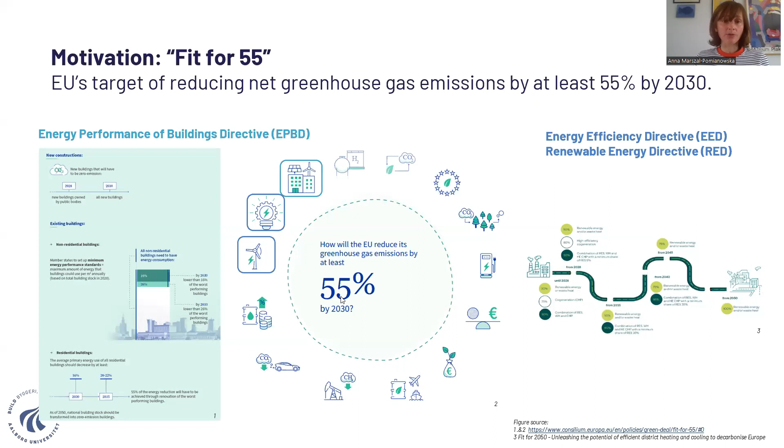So we have two, or actually three, directives pointing both to the building sector and to the core of district heating and cooling, because one cannot exist without the other. On the other hand, you also have the district heating and cooling system's own transition.

This also pushes the building sector to be designed and operated so that these lower temperatures are enough to heat our houses. This is also driven by how many different systems or technologies are involved in the different district heating generations, and we expect more low-grade waste heat and more heat pumps, which operate best at low temperatures.

This is also what is pushing the building stock to become more efficient and enable this transition for district heating and cooling systems. So those are the drivers for the building stock to go through this energy efficiency and digitalization transition.

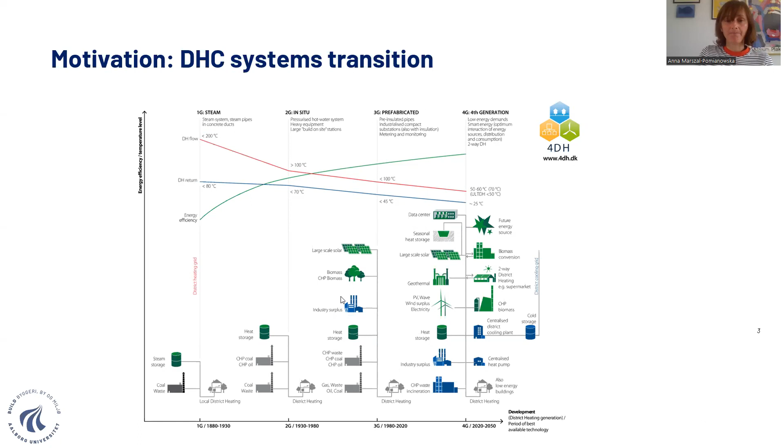Then the next question is: is the building stock digitalized? This is a bit difficult to say, how do you measure if the building stock is digitalization-ready? But I came across some statistics showing the penetration of smart homes, which to some extent is understood as buildings that are digitalized, having smart solutions we can control remotely, like setting our thermostats on and off.

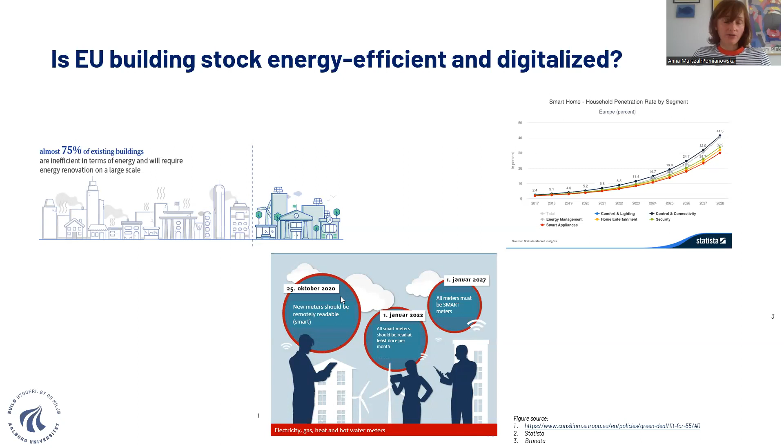Now I will start with this framework and tell you what we do on our side in Denmark with this data from smart heat meters. Our district heating sector is very well developed — more than 65% of our buildings are connected to the district heating system. This means we have a lot of data from around 2022.

They also have 6 different periods. You could think we're used to saying we have summer, winter, fall, and spring, but our studies show we have 6, and we don't have a fixed heating start point of the heating season.

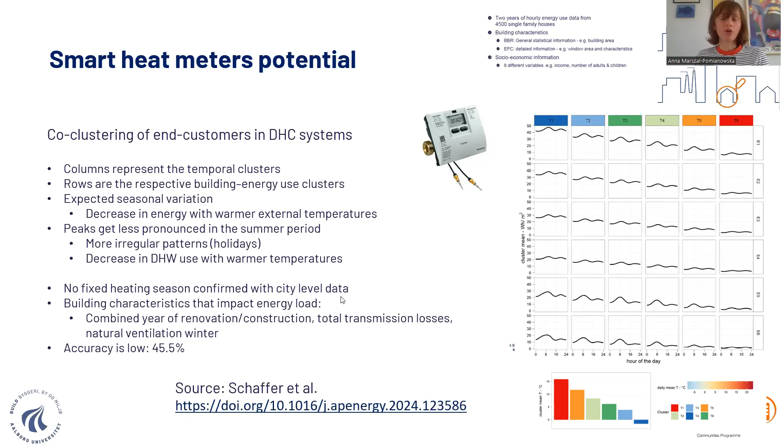This is because of all the heating habits that occupants have, their heating practices that impact how the load looks, and we don't have this information. So this is where we feel there is still a kind of low-hanging fruit — to look more into occupants to achieve energy efficient buildings.

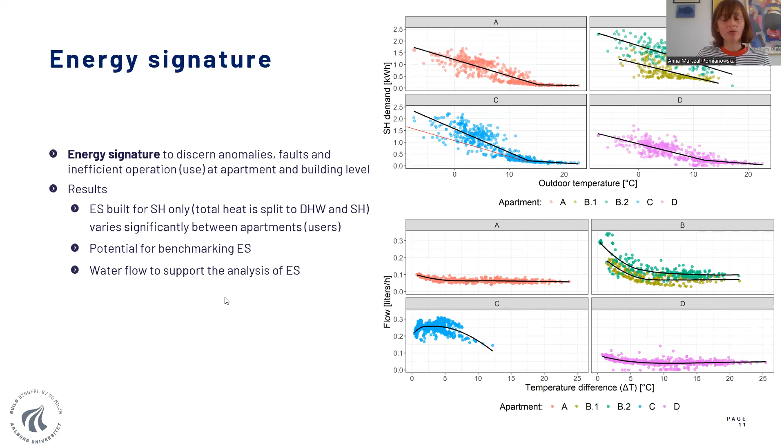So probably either they have higher temperatures, maybe they ventilate the house differently, maybe they don't use all radiators to heat up the apartment, maybe they only have one. That means it's what we call inefficient heating behavior. So this simple correlation between outdoor temperature and space heating demand shows us how big an impact occupants' heating habits have on how and when the heat is consumed.

And then to build further on that, to zoom in even more on what happens in those apartments and where are potential faults or places for efficiency improvements. Yes, so where are those inefficiencies? We also work with this data, and I have to say it loud and clear...

This is data that comes from the commercial smart heat meters. We don't do any magic to the data, we don't treat it to be, I don't know, higher resolution or look better. We just take what all the utilities have from the smart meters, and we looked into faults.

The first thing we have acknowledged is that many occupants don't understand how to operate their heating systems efficiently. They think that if they have one radiator running, this is actually the most efficient way to heat up their houses. We also acknowledged that heating systems are very diverse, and this is the challenge.

It's a challenge to make uniform energy efficiency policies or standards, because some people have underfloor heating in the whole apartment, some only in the bathroom, some only in the basement or the garage. So all of those operate differently, and this is what we looked into - what is the typical behavior of the data from the smart meters that indicates what the fault is.

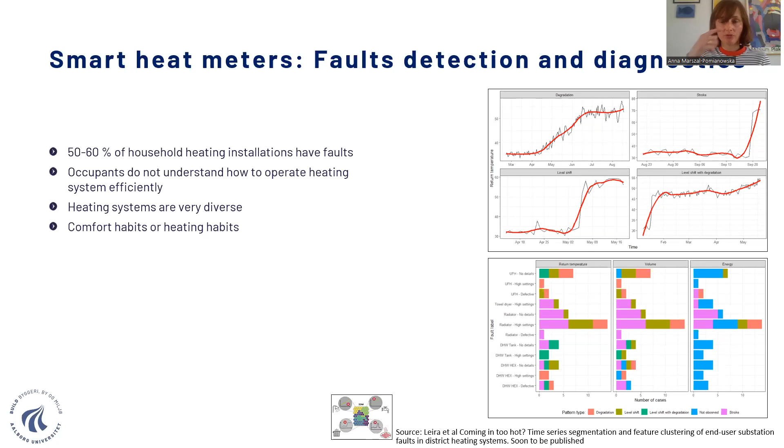Our main finding was that if we want to proceed with automatic fault detection - which is what many utilities would like to do - we have to move away from energy and instead start to look only at the return temperature from the houses. Or, of course, sometimes in combination with volume. Those two parameters should help us achieve an energy efficient building stock that uses the digital data available to improve energy efficiency.

And then I think the final slide goes back more to the helicopter perspective - what I like to say is to look at what the potential is, where the weaknesses are, where the opportunities are, where we want to integrate the energy system, the heating sector, with the building sector. So how the two can benefit each other - buildings delivering some flexibility, maybe some short-term storage to the thermal networks. We conducted a SWOT analysis and identified 17 different components.

One of them, for example, is that there is a lot of state-of-the-art knowledge on this aspect. District heating and cooling professionals just have to tap into this state-of-the-art knowledge and hopefully integrate it into their business-as-usual practices.

We have acknowledged that customers are ready and aware of their potential to contribute to solving some challenges in the district heating and cooling sector. It's a lot about social and economic aspects we have to think about - what are the business models to activate the buildings, and how digitalization can help to do it.

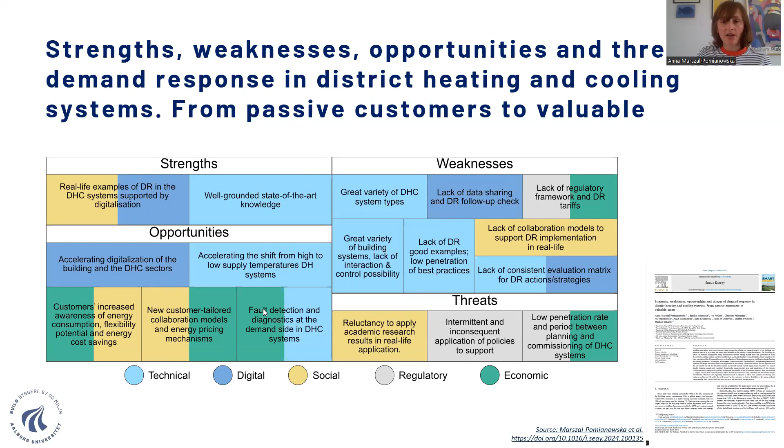Maybe one of the weak points of proceeding with even better digitalization is the lack of sharing data between the different stakeholders in the whole value chain. So this is a finishing slide to say that if we want to reach an efficient and digitalized building stock, we always have to think about the building systems, not only household practices but also the surrounding utilities and framework, because some energy efficient and digitalized buildings will be suitable for one type of district heating system, but the same ones might not fit another configuration of the district heating and cooling system. So copy-paste solutions might be good to look at, but not the only way to go.

So this was all from my side. Thank you very much for the invitation and the possibility to talk about the building stock.

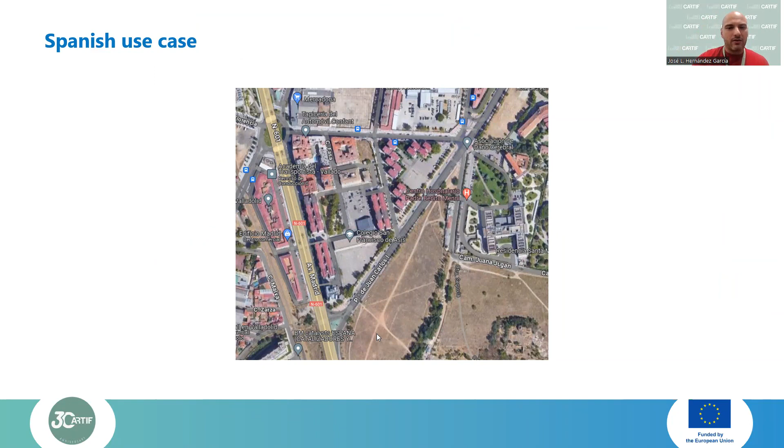In this sense, let me go to the Spanish use case. This is the set of buildings that we have in our district heating. It's composed of 20 buildings. Some of them are together, so you can see here this distribution of the buildings. This is located in the Valladolid city, that's the location where I live.

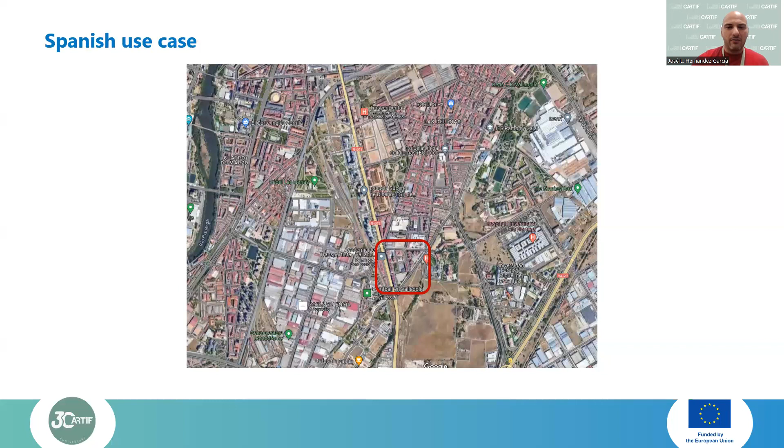Finally, this is Valladolid, located in Spain, continental climate. And in this sense, you can understand what is the context of where we are and why this district heating is important according to the climate conditions that we have in Spain.

The configuration of the district heating is, as you can see in the slide, we have 3 boilers. First, 2 of them are biomass, and one of them is the gas-fired boiler to support the peaks of energy.

The district heating network is providing energy to the 20 buildings I mentioned before, and also the electrical needs for energy that are coming from the grid, but also a PV system that uses power to heat in order to contribute to the domestic hot water demand.

But also they are using it for the buildings. But usually the excess of energy is not too much, to be honest, and is mostly used for the thermal energy usage.

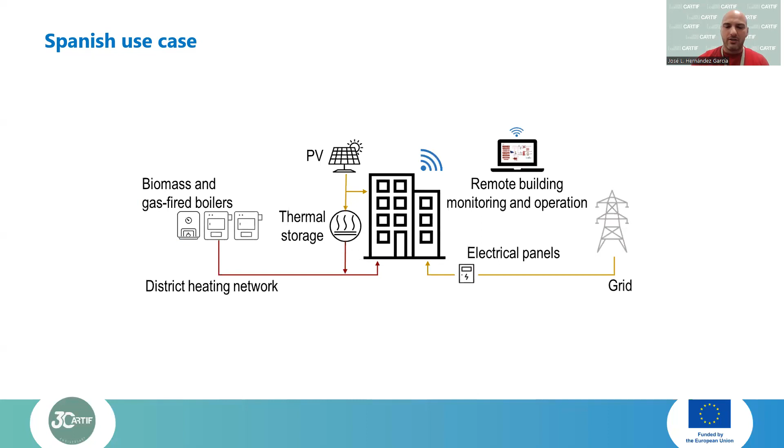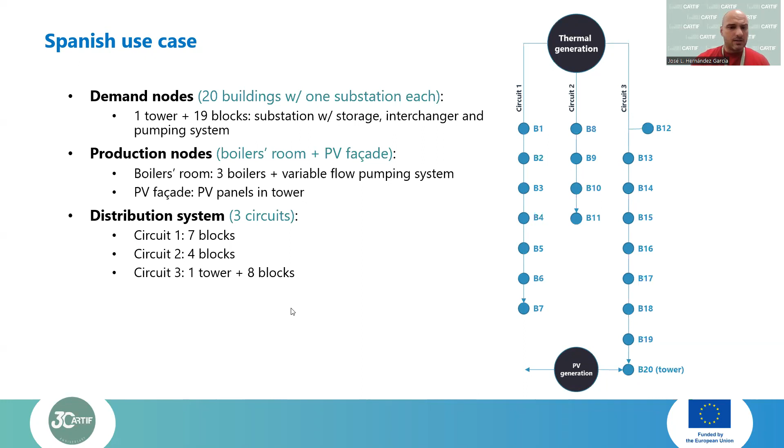We have, as mentioned before, the 3 production nodes with the boiler room, 2 of them biomass and 1 of them gas fired. And as I mentioned before, the distribution system.

...that we have the users' information that is very important, not only for the feedback from the occupants about comfort, but also facility managers. So all the stakeholders should be involved in the digital twins. In this sense, we have the comfort parameters from the users, but we also have the operational parameters from the facility managers, because they need to determine how the district heating network should operate according to the different set points for the temperatures, the different hours for schedules for the boilers operation, and so on.

Usually, as I mentioned before, the different information, the real-time information is coming from the SCADAs for the system, so the real-time sensors that they have. But this is not enough in our case.

We are also using what we mentioned, the district heating information model, that is contextual information that provides enriched data for us. That is like the configuration of the system, the pipes, the insulation of the pipes, the part of the buildings as well, how the buildings are insulated, and this information that provides us the demand and the losses of the system. That is very important.

In many occasions, this information is not used in the district heating operation. This is part of the district heating, the buildings and the pipes and the distribution system.

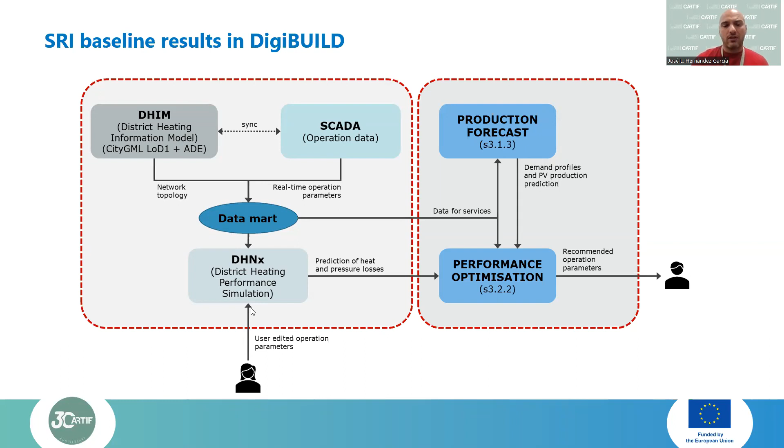With this, we have created a model, a static model for the buildings, as you can see on the screen.

We base this on CityGML information, where you can see not only the buildings in order to provide the demand, but also the pipes of the system, the different circuits of the system—first, second and third circuit—in order to obtain the distribution losses in the network.

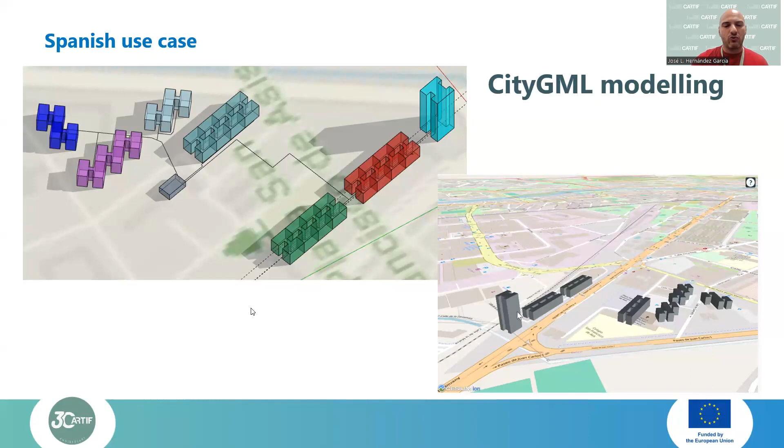Here you can see the 3D model of this system in order to provide the visualization that I mentioned in the first slide, which is also very important in digital twins: how to visualize the information and provide useful data to the users.

You can see here how the digital twin looks like. We have the CityGML model with the different buildings in the area, and we can see different information from the buildings—static information about the heated area, the energy demand, and so on. This will help the decision making.

The static information part is not changing along the time, but the energy demand is continuously calculated in order to determine the energy demand in terms of domestic hot water heating and cooling—mostly heating—for each one of the buildings.

With this, we are able to simulate the different conditions of the system. You can see here the heat losses and the pressure losses in the distribution system according to the configuration from the user, and how the different circuits behave according to the operational parameters of the facility manager.

With this, we are able to provide an algorithm to optimize the energy resources that we have, which is currently being developed, but at least the user has this kind of information in the digital twin. This includes not only real-time data coming from the SCADAs and applying artificial intelligence, but also static information that provides all this contextual data that is very important in the digital twin.

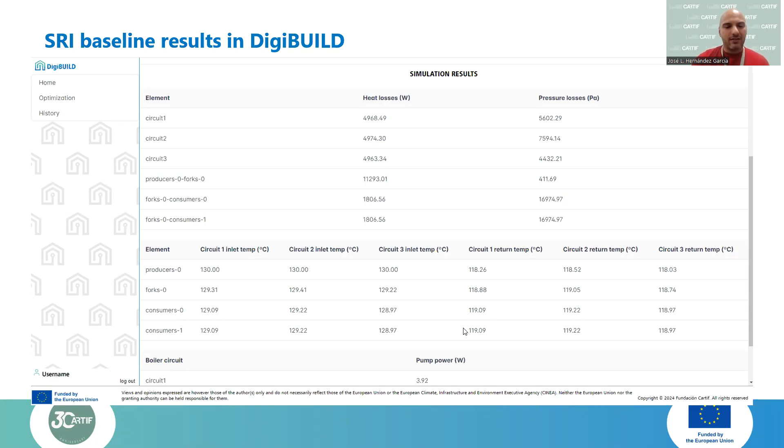According to these developments, the benefits we have in this design are that with this data we can define the optimal management and control strategy for the facility manager, how to optimize the behavior of the network, as I mentioned across all the presentation today.

Very importantly, at the end, we are working with facility managers—they want to earn money. So we are also reducing costs because we are reducing the wasted energy in the district heating. We are not generating more energy than needed.

We're also enlarging the life cycle of the boilers. We are able to balance the load for the different boilers in order to provide just the demand that we need, not providing more energy than needed. This means the boilers will work fewer hours than currently, improving the quality of life of these boilers.

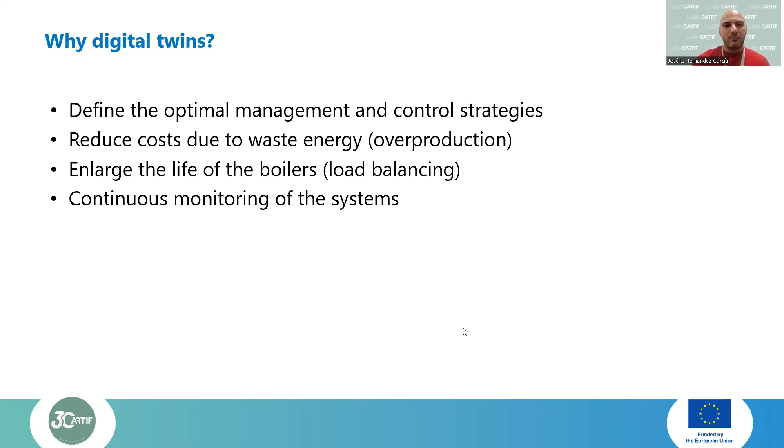Monitoring of the system—as I mentioned in the first slide, real-time monitoring. So we are all the time monitoring the systems and adapting the set points and the different conditions of operation according to this data. And yeah, that's all from my side.

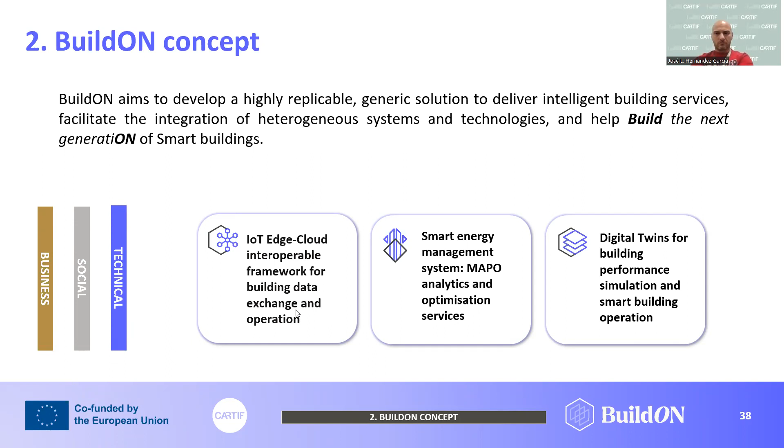BuildON is built on three main pillars, or three main dimensions: business, social, and technical. We will delve more into the details of the technical one. Today, there are three main components delivered in the framework of the project.

The first is this interoperable framework to facilitate seamless exchange of information. Secondly, we have a set of smart energy management solutions through the MAPO services, which we'll provide more details about later. And finally, the digital twins for building performance simulation and also for operation. As I was saying, this is actually one of the main challenges of the project, because we will try to go a step further.

If we go more into the details of the MAPO services, it corresponds to monitoring, assessment, prediction, and optimization services. These categories are divided into different layers. There's one layer, more analytic, in which we will provide services first for energy assets monitoring and benchmarking, and secondly for energy fingerprinting.

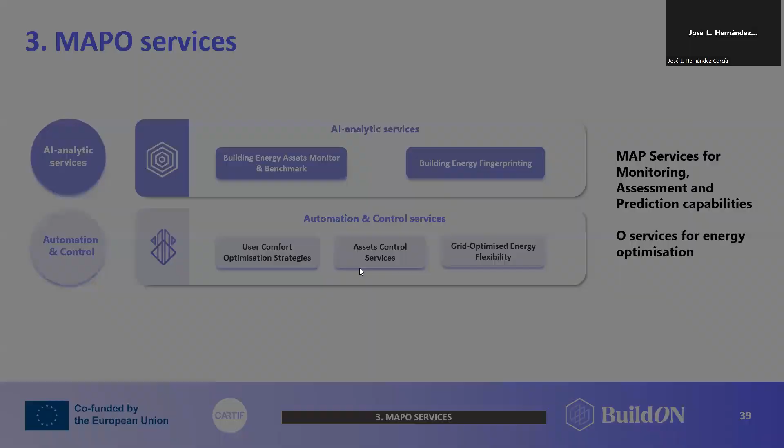The BuildON solution will be demonstrated in 5 pilots, but today we will focus on 2 of them, which are residential. One is located in Spain, the other in Finland, and we are covering different typologies under different climate conditions, energy configurations, and different kinds of stakeholders. These 2 buildings have quite a lot of similarities because of the typology and the kind of stakeholders we find, but there are some differences between them, as we will see now.

In the case of the Helsinki pilot, it's a 4-floor building with 32 apartments, which was built in the 70s and renovated in 2022. The main goal here is to enhance the building performance of the whole building while we keep the environmental conditions for the residents.

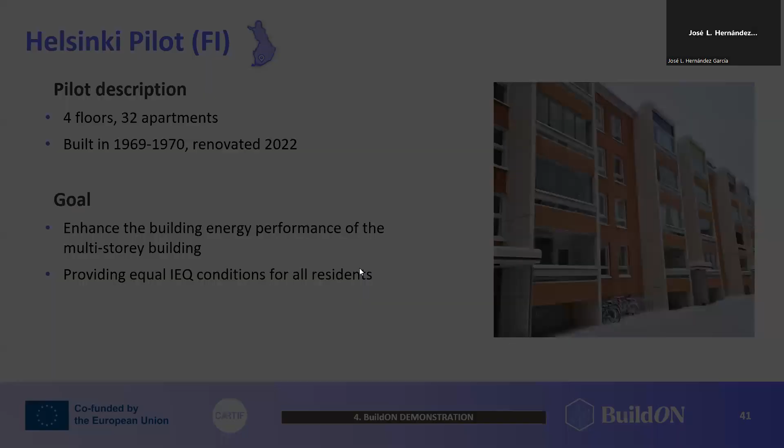In the framework of the project, we are installing electronic radiator thermostats per room in all the apartments and also in common zones. These thermostats are complemented with different kinds of sensors for temperature, humidity, and CO2 levels.

This way, we will try to provide cross-domain energy asset control services to enhance the energy efficiency of the building, considering energy generation patterns, consumption, and also user feedback, and we will try to provide control to users. As I said before, this control will be done at the room level, and we will also have digital twins to support the energy performance simulation.

If we jump now to the Valladolid pilot, located in Spain, the pilot is quite similar to the previous one, but there are some differences. In this case, we are focusing on this tower building that was presented before by José. This is part of the district heating network he was mentioning before. The building has 14 floors, 56 dwellings, was built in the 60s, renovated in 2018. The goal here will be to improve the energy performance without compromising the indoor environmental quality of the dwelling.

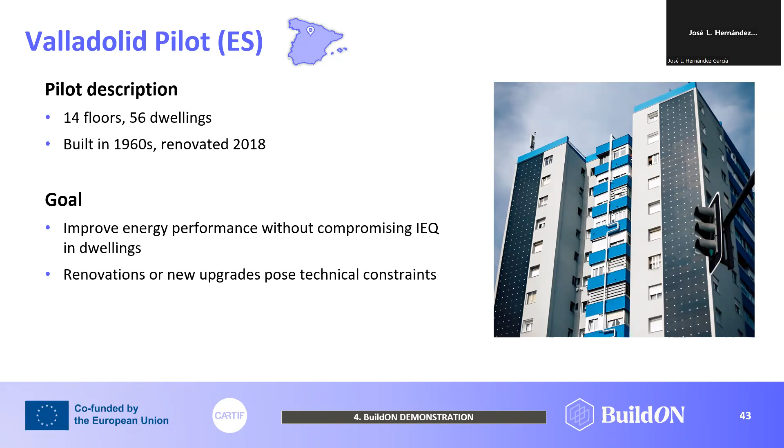And also considering that there are some technical constraints in the building, and also some constraints related to investment. As this building was renovated some years ago, there's not much room to make a huge investment. That's why we are proposing a digital solution which is much more affordable.

On the left, we can see the technical systems infrastructure in the building. In this case, the building is connected to this district heating network, but there are 20 substations. This is represented by one of them. There are 2 biomass boilers and 1 gas-fired boiler, and a thermal storage tank for domestic hot water, and a PV ventilated facade, and actually this energy was mainly used for the domestic hot water. We are also installing thermostatic valves, making them smart, and temperature and heating sensors.

So we want to prioritize the use of renewable energy sources to reduce the carbon footprint of these high emission energy sources, and to provide energy assets and device control capabilities to improve energy efficiency, the use of renewables, and also to integrate the user's feedback. In this case, we are providing not only digital twins for performance simulation, but also the ability to control directly the technical energy systems of the building.

Just to conclude, I wanted to highlight some of the challenges we are trying to face in the framework of the project. The first is this lack of awareness on the potential of smart building technologies. Actually, end users are not very familiar with these kinds of solutions. This is a real barrier we need to face in order to demonstrate our technologies and the impact they can have. Secondly, artificial intelligence, which is the basis for our services, can never replace end users. In this case, we are moving from the recommendation level to the control level, so the risks we need to face are even greater.

We need to keep users in the loop and consider all the feedback they can give us in order to make better decisions. Finally, the lack of replicable solutions in the market is a fact. That's why we are going to provide this generic solution. In this case, we are demonstrating the same solution in different kinds of buildings with different configurations of services, hoping we can break this barrier and enhance the smartness activation of buildings at scale. And that's the end of my presentation. Thank you for your time.

Thank you very much, Sofia. Indeed, we are in the era of artificial intelligence technologies, and it's crucial to focus on finding the best ways to use them. I think the BuildON project is particularly interesting because it goes a bit beyond simply providing recommendations for optimizing energy operations, but actually aims to implement control mechanisms, which allows us to improve the energy performance of buildings while still maintaining thermal comfort for the occupants. So many thanks for sharing these insights, Sofia.

As we are today discussing smart tools and smart services for buildings, it is also important to be aware of the new EU scheme for assessing the smart readiness of buildings. Therefore, we are very happy to have with us the coordinator of the SRI Enact project, Stamatia Rizou. She is the Research and Development Manager at Singular Logic, leading the research team in data technologies and artificial intelligence applications.

Stamatia holds a diploma in electrical and computer engineering from the National Technical University of Athens and a PhD in distributed systems from the University of Stuttgart. With over 10 years of experience in European research and development projects, she is currently coordinating several EU-funded initiatives aimed at developing ICT solutions for energy efficiency in buildings.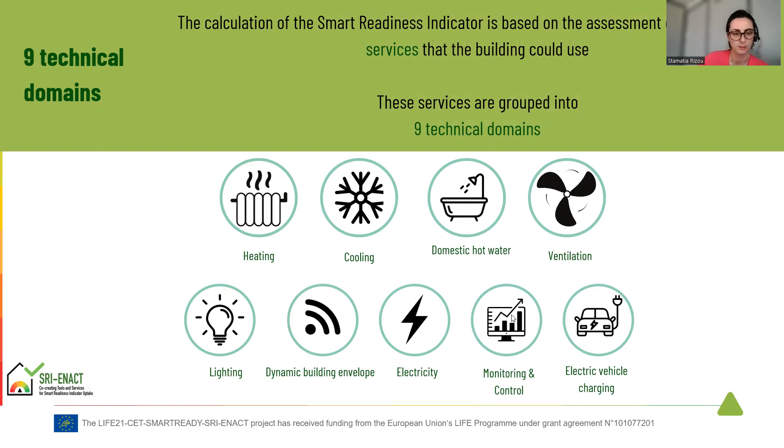Just to give a little background on how the SRI evolved over the last years: it started back in 2017 with the definition of this new indicator and the first technical study, together with initial stakeholder consultation. In 2018, it was included as an optional scheme in the revised EPBD. Then followed another technical study which proposed a concrete calculation for the SRI scheme. In 2020, we had the release of the formal definition and calculation methodology, upon which our project and other sister projects are also relying to calculate the SRI score for buildings.

In 2021, the SRI support team was composed. We are right now in 2024. After this, new projects, especially LIFE projects SRI Enact and 3 other sister projects, started with a specific focus on the implementation of tools and methodologies for the SRI. So the landscape is continuously evolving, and we try to follow all these new developments happening from the different initiatives.

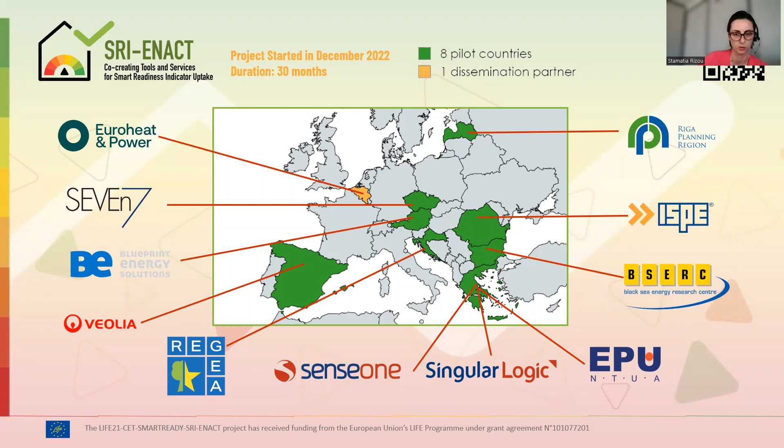The goal of the project itself is divided into 4 main pillars. One pillar is about stakeholder engagement. This is a transversal goal for our project; we want to continuously work with stakeholders, and since SRI is a very dynamic scheme, we want to be in contact with national stakeholders to see how we can practically find implementation pathways for SRI in the different countries.

Secondly, we are also developing, and as I will say later, we have already released a toolkit for facilitating the calculation of the SRI, and also providing some additional decision support tools that could help in proposing potential smartness upgrades of the building.

Another main goal of the project has been the pilot assessment. We have a goal to apply SRI and calculate the SRI for more than 1,000 buildings across these 8 EU pilot countries, and to do so we will train at least 120 SRI auditors to help with this ambitious work.

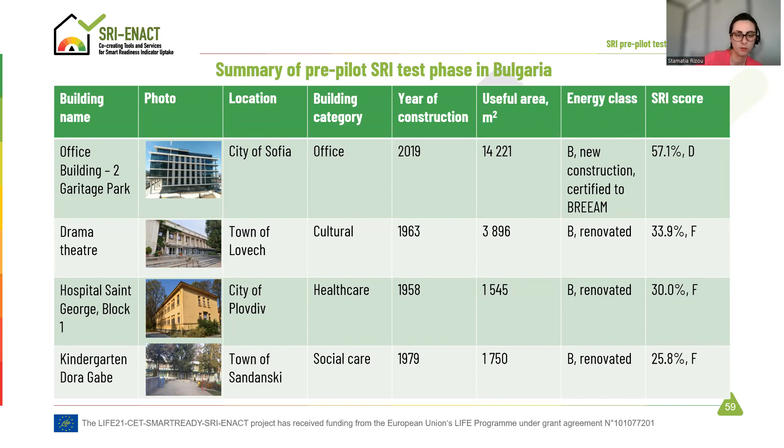I'll give an example, a summary of some pre-pilot tests that ran in Bulgaria with 4 different buildings: office, theater, hospital, and kindergarten. They all have an energy class B, but SRI scores vary from F to D for the first building. There are several reasons behind this score.

We have put together some main reasons: the office building had a higher number of applied smart technologies. This particular office building that achieved a high score was constructed to meet BREEAM standard requirements, and had a PV system installed and EV charging points in the car park. So there are different aspects that affect the score.

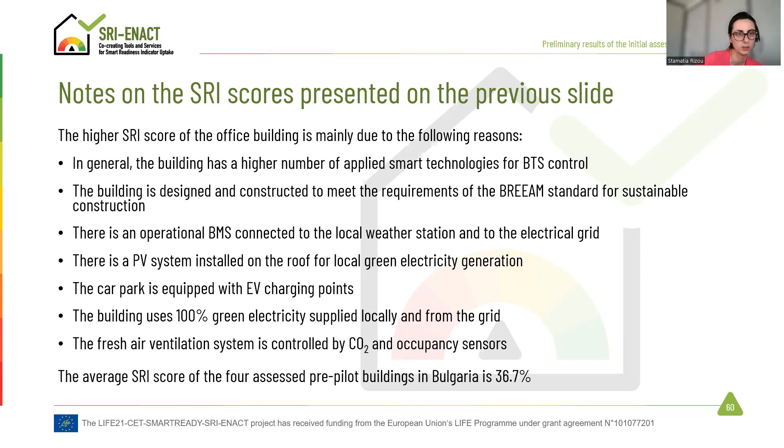The average SRI score for these 4 buildings in Bulgaria is 36, but we will continue with more assessments, and I think at the end we'll have much more interesting insights about the application in different heterogeneous buildings and conclusions we can draw in the different countries.

So our next steps in the outlook is basically scaling up the work that we have done up to now: go on with more trainings, more assessments, continue with the training seminars, recruit external auditors, extract overall lessons learned and blueprints, and of course promote actively the results of the project.

And I take the opportunity to kindly invite you, if you are interested to make an SRI assessment or you are interested in the project, we will be happy to get in contact. Also Laura, as our dissemination manager, and myself, we are always very motivated to have collaborations with other projects in the context of the SRI scheme.

Many thanks. Thank you very much, Stamatia, for sharing this valuable information. And I believe that it's very important to understand the smart readiness indicator, because the SRI scheme will soon become mandatory for some types of buildings.

And it's great to hear that thanks to projects like SRI-ENACT, there are already tools available to help us not only calculate the smart readiness indicator, but also estimate the impact and financial cost of proposed measures to increase the SRI score over a building.

So many thanks. And having learned what is currently being developed in terms of digital tools to support energy efficient buildings, let's look at the actual definition of an efficient building according to the Fit for 55 package.

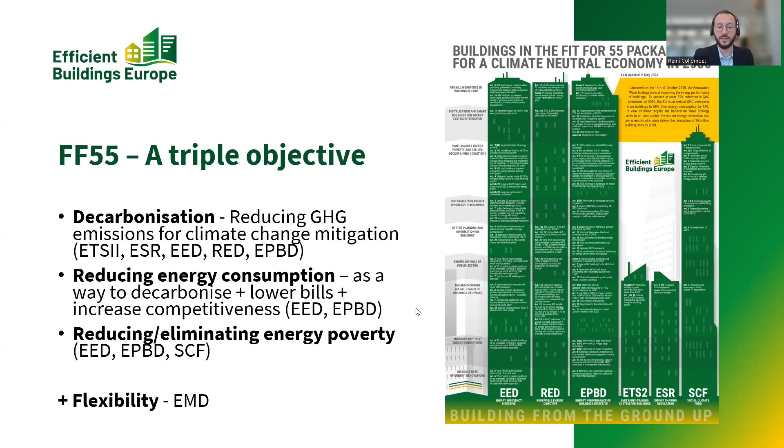Now there's a big question, now that we have all these shiny, ambitious targets, of how do we plan and how do we make sure that there are logical steps towards the achievement of this fully decarbonized building stock. We have different provisions in different files that are not really aligned at the moment, and this is a potential challenge for member states in the coming years.

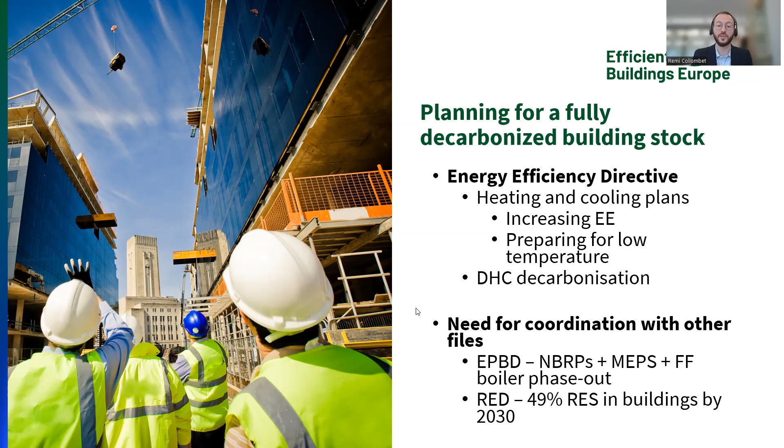You have the Energy Efficiency Directive, where you now have mandatory heating and cooling plans for larger cities, with a focus on increasing energy efficiency, preparing for low temperature, and provisions on the decarbonization of district heating and cooling. Next to that, you have provisions on other files regarding building energy renovations, namely the national building renovation plans and the minimum energy performance standards.

So not calling them that directly, but renovation obligations, phase out of fossil fuels in buildings, and mandatory ramp up of the share of renewable energy in buildings in the Renewable Energy Directive. Now, just to focus a bit on a few of these measures regarding the timing, you'll have the end of subsidies for standalone fossil fuel boilers already from the 1st of January next year onwards.

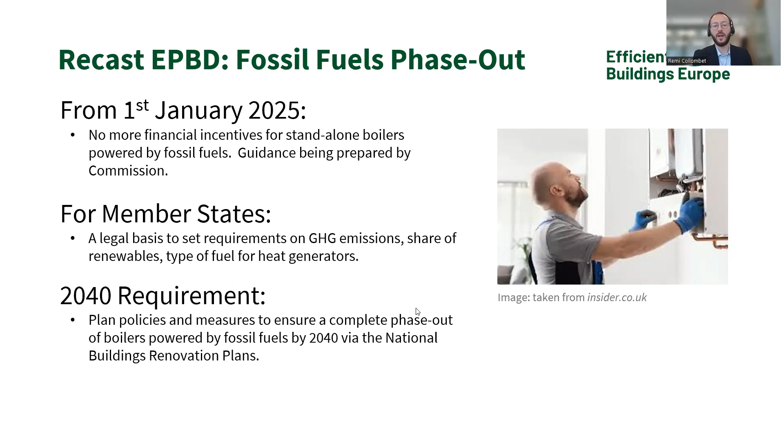This will be next to the minimum energy performance standards, so the renovation obligations that I mentioned. They're very stringent for the non-residential sector, so we'll have to renovate the first 16%, then 26% worst performing buildings in the sector. That's where you get the most efficiency gains, and they're very stringent obligations. Member states are already looking at how to implement those measures.

Timelines are 2030 for the first batch, 2033 for the second one. Next to that, you have a very different approach chosen for the residential building stock, where there was no ability to find an agreement, especially within the councils or member states, on having something very stringent and binding for the residential sector. So an average trajectory approach in terms of primary energy consumption was chosen, where you have minus 16% by 2030.

And minus 20 to 22% in 2035. So regarding the achievement of these targets, it's a bit more open, leaving more flexibility regarding how you want to achieve that. As it's primary energy, you can either look at decarbonization of heating and cooling or lowering the overall consumption through energy renovations.

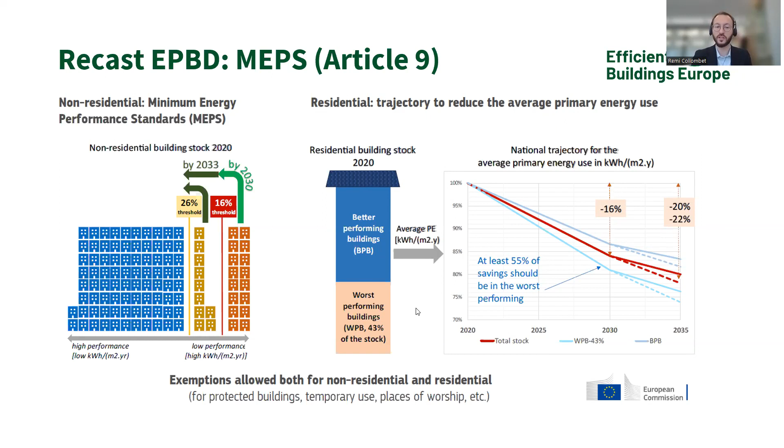Now, having said that, what now? How do we really achieve that? How do we make that match? One of the main opportunities to coordinate and actually go from ad hoc separate policies to something a bit more integrated, looking at real industrial policy for the sector, would be the national building renovation plans.

This is an exercise where member states have to translate the targets that have been set at the European level into concrete policy measures and put next to that the appropriate funding, the appropriate requirements at national level. And this is real time where stakeholders, all of us, need to be engaged to make sure that this is coherent and there's a long-term stable framework for the sector.

Where there's clear indication for citizens and businesses of when do I need to renovate my building, when do I need to change my heating system, does my city have plans for deployment or extension of district heating and cooling systems, when it can plug into that. So this really needs to answer all the various questions actors might have, provide clear information, so that on the company side, the industry, there can be planning in terms of the skills people hired, the extension of production facilities in Europe to meet the demands of the sector and actually achieve the targets set by the various pieces of legislation.